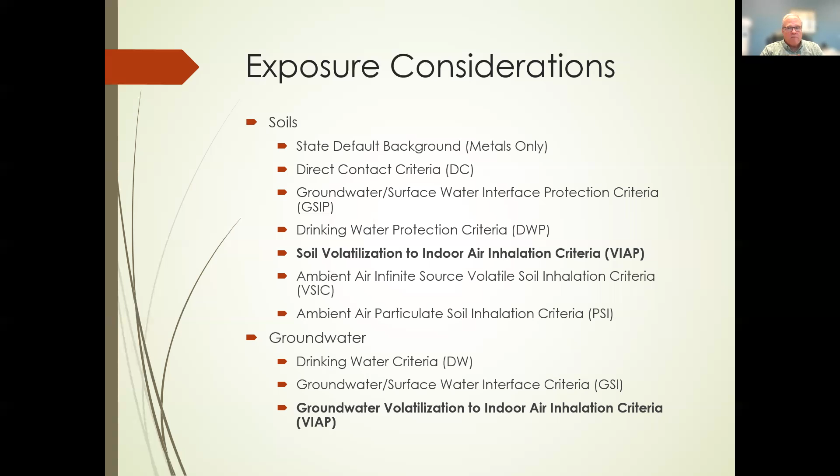Depending on which of these pathways are applicable to your property, you may have different obligations and different procedures. The two I'm going to be talking about shortly are in bold: soil volatilization to indoor air inhalation criteria, and groundwater volatilization to indoor air inhalation criteria. These are two exposure considerations which go to the concept of vapor intrusion, a concept we're going to be talking about, and where most of the change in how you comply with environmental and due care requirements has been occurring.

So let's talk about the basic approach. This is the basic buyer's approach for environmental due diligence. We call it the environmental due diligence process. You'll notice some things are in bold — those are particularly important. Some things have stars — those are the basic liability protection documents from Michigan, there are three of them. Some things are in gray — those don't always occur, sometimes they occur but not always. And then there's a whole bunch of other things in white.

Due diligence is, of course, done to establish liability protection, as I mentioned before, but also the function has to be to identify impediments to development so that you can address them, either by remedy or through some sort of due care obligation.

If your due diligence is not providing sufficient information to understand your obligations on the property, you're not going far enough. This process of obtaining both information and statutory protection has been part of the real estate process since about 1985. When people look at when you should have done due diligence, what was important for due diligence, they generally go back to 1985 and say, if you bought it before '85, you probably didn't have all these procedures. Did it after 1985, you did.

While those fundamental processes remain the same — doing a phase one, doing some sampling, trying to figure out what you have and what you're buying — the fundamental process is the same. They have changed in both how the assessment is done. There's a new standard that just came out in '21, for example, that we'll talk about shortly, and in what you have to do to achieve completion or closure. And all these things now affect real estate timing, the approval process, the construction sequencing, and the cost of doing this.

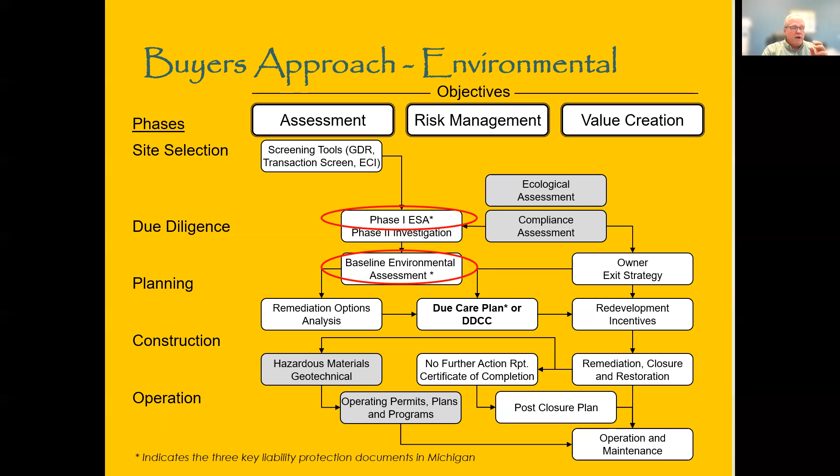In all cases, a phase one needs to be done. I would strongly recommend that any purchase other than a single family owner-occupied residential does a phase one. It's cheap insurance, it gives you some background, it's a good screening tool. The BEA we talked about — those are on facilities only, and only in the state of Michigan. And then we just talked about the due care plan.

Let's look at the different types of properties. For greenfields, which is not really the subject of this presentation, it's much simpler. You do a phase one, there's probably some ecological assessment — wetlands, threatened and endangered species, habitat, something like that. A lot of communities have tree ordinances, but the process is fairly straightforward. When the phase one is done and nothing comes up that's of concern, you're done with the process. Those concerns are called recognized environmental conditions in phase one — that's the term of art.

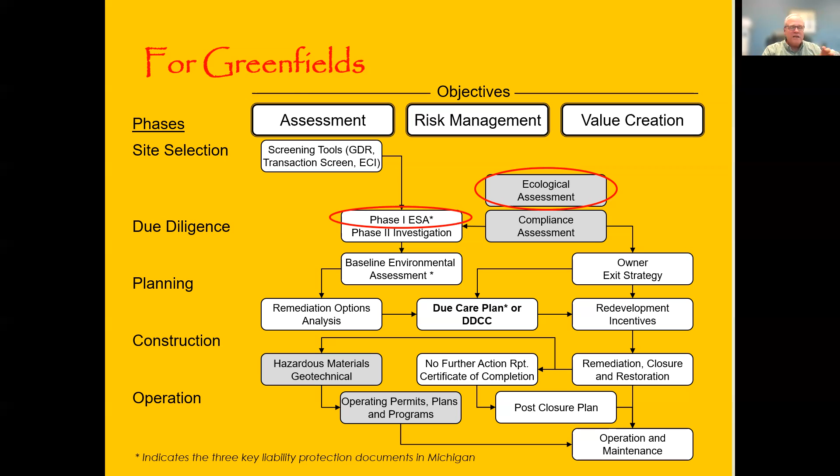On a greenfield site, it usually plays out simply. However, don't assume for a minute that all greenfield sites are simply phase one and done. Use of sites as orchards, underground storage tanks, fueling operations, overuse of pesticides - these things can crop up in a phase one on a greenfield site, but the process generally is much simpler.

In urban properties, it begins to get a little bit more complicated. There's a higher probability that the property is going to be impacted from historic use, and therefore a facility as we've defined it, and additional steps are probably required. The extent of these steps will depend on the chemicals identified, the pathways that are exceeded - we talked a little bit about pathways - and most importantly, the intended future use.

I'm guessing that for most repurposing of commercial, it's going to be repurposed to residential, and that is the most sensitive intended future use. So consequently, there's a lot more documents. There may be a remediation options analysis. You may have to look at hazardous materials in a building or geotechnical issues for a new building because of fill material. You may have some remediation, closure, and restoration, or you may be putting in some kind of remedy that requires operation and maintenance. So it just gets a little bit more complicated, especially on urban sites.

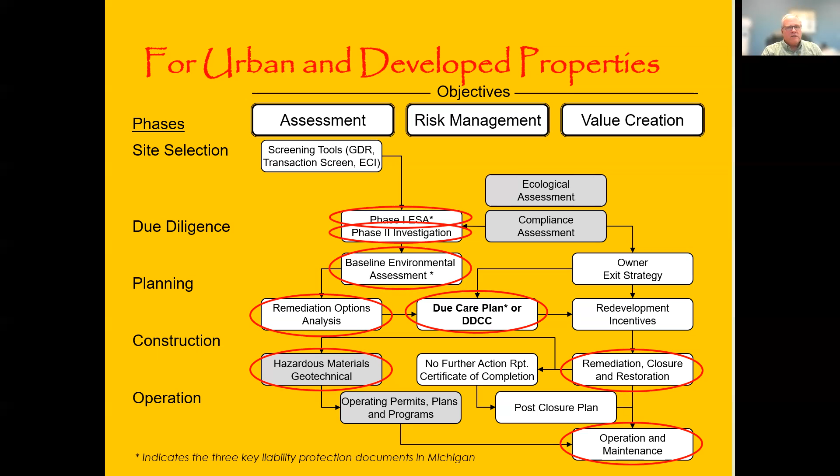Now there's a subcategory of this for acquisition of an existing business, typically an industrial business. In this case, there may be additional compliance assessments, additional operating permits, plans, programs, things like that. So it adds another level of complexity to the process.

And then by far the most complicated kind of subcategory is when you have to have agency approval. This is becoming more common, believe it or not, which is part of the challenge now in repurposing commercial properties. In this case, you pretty much hit every box - there's all kinds of things that need to be done. I'm going to show you what ends up in some cases being an infinite loop on these programs. But you need a lot more assessment, a lot more discussion, a lot more proving out what your assumptions are on the property.

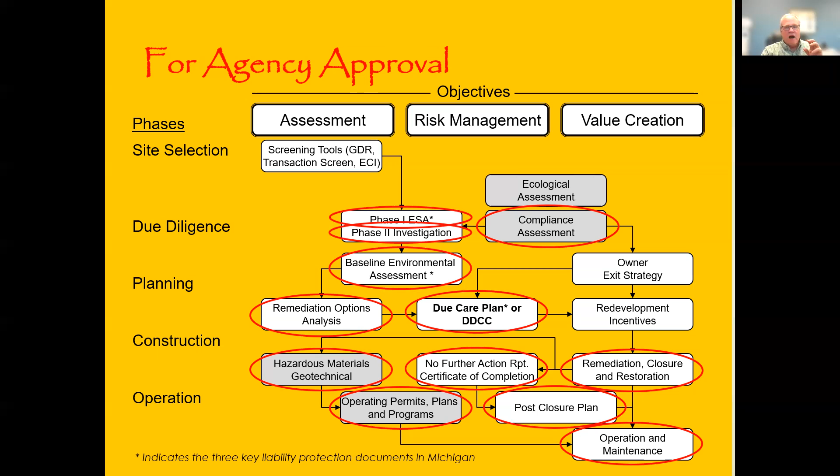Now, there are some other boxes on here that we haven't talked about. There is, for example, screening tools, up there in the upper left-hand corner, which are very useful in identifying big issues on a property, or more likely, they're very useful in identifying and comparing multiple properties. They're quick, they're inexpensive. You can look at 10 or 12 properties and say, well, this one's got a lot of hair on it, I'm not interested in it, so let's winnow it down to a couple and then spend some real money.

But in creating successful real estate deals, there are also some other considerations. On the right-hand side there, we have a couple of them, one of them being negotiating an exit strategy with a reluctant seller. This has come up time and time again, where you have somebody who owns a piece of property and they know that it's contaminated. They don't want to be sucked into a whole bunch of what are called affirmative obligations under the Act, and so they've just held on to it.

They really don't want to do anything with it. Well, there might be an exit strategy. There might be something that protects both the buyer and the seller. There might be something that can be put together to make that seller much more comfortable with the transaction.

And then, of course, underneath that, there's the whole idea of incentives. How do you, in some way, offset these costs? The whole concept originally was leveling the playing field, right? The incentives were provided so that building on an urban site, which has all kinds of additional extraordinary costs, would be the same as or a little bit less expensive than building on a greenfield site. You would level the playing field and more people would build on urban sites. So these incentives are out there to help do that, to level the playing field, to assist in those costs, and they primarily focus on urban brownfield type sites. So they're very much part of the conversation.

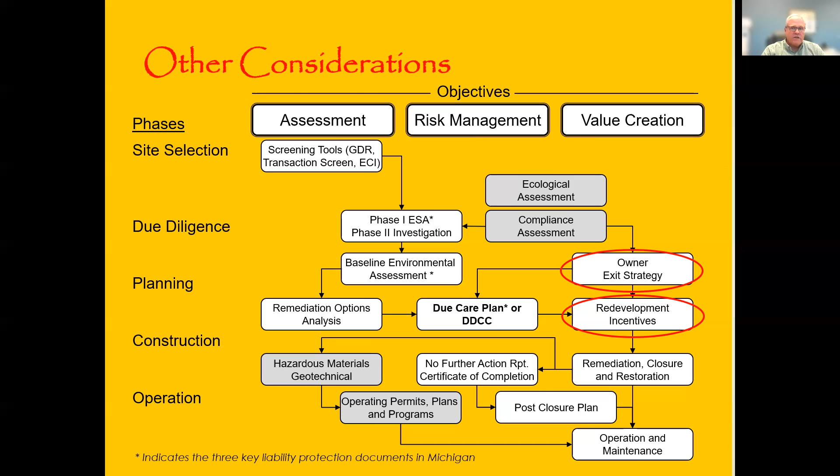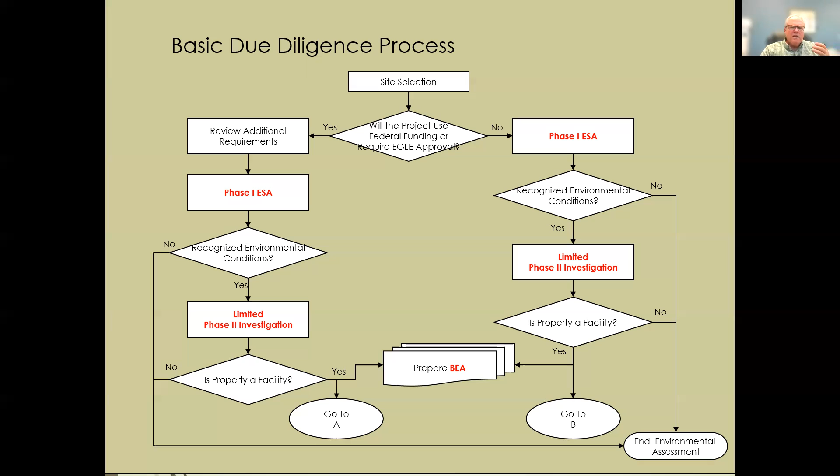And in both cases, you ask the question, is it a facility? If it's a facility, you have to prepare a BEA regardless of which way you go. If it's not a facility, you're out again, and the process ends. But where the real difference happens is when we go to the next slide.

In fact, good science would dictate that regardless of which process you take, you end up putting in a remediation system or a mitigation system that solves the issue. And it should, all things being equal, be the same system regardless of which process you follow.

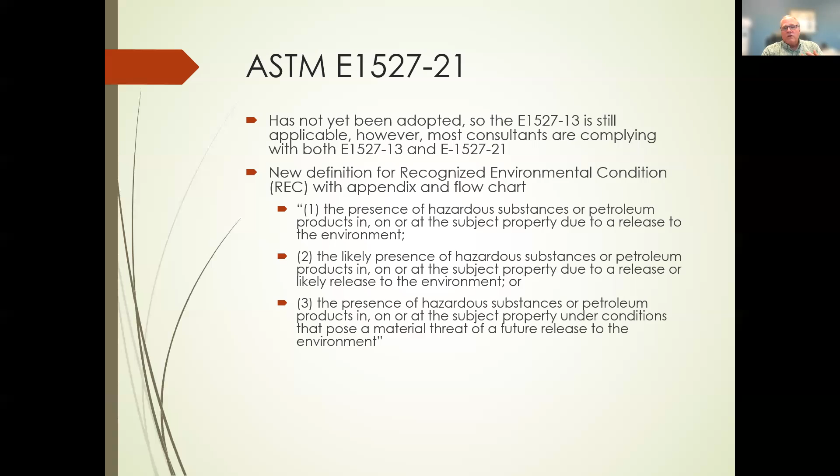This definition and all of the other supporting materials for it, as I said, has already been pretty much in effect for most consultants, and therefore it isn't a big change, but it helps focus and it helps make it more intentional. There's now a requirement to use standard historical sources.

There's been some controversy over using, for example, free historic databases, which don't tend to be nearly as robust as things like the Sanborn maps. And so prior to this particular change, the standard required that you used as many as you could find or as many as you deemed necessary, which could only mean a single source.

Now, you've got to look at these three at least for both the subject property and adjacent property. And more importantly, if you can't review them, you have to say that. In the past, you didn't have to say that.

So again, it's becoming a little bit more intentional and a little bit more robust. It's added a non-scope consideration section.

Now, those of you who are familiar with bank lending requirements know that often in the lender's documents, they'll have additional requirements for phase 1.

Well, we call those non-scope requirements because the bank is requiring them, not the ASTM standard. They've taken a similar idea here and said, look, there's a lot of discussion out there about other things that are going on, especially emerging contaminants of concern. And they're not specifically in the scope of the phase 1, but we really think they should be considered. So these are now called non-scope.

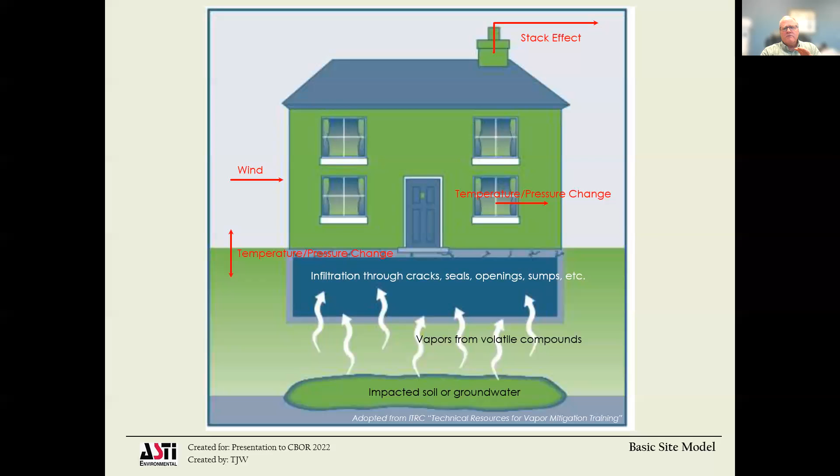So the first challenge is that these regulations and guidance documents are predictive. They don't measure actual harm. Sampling is used to predict concentrations and then to predict risk. And so depending on your model, depending on your site conditions, depending on how good your model is, you can end up with different results.

So what we typically do is we take a soil sample. That's always the first kind of idea on it. We then may take a soil gas sample underneath the slab in the building, and then we predict what's going to be the concentration in the building. Now, I'm being somewhat simplistic in it, right? It's a little bit more complicated than that: nature and extent, determination of physical conditions that may affect volatilization and vapor transport. But in the bottom line, that's what we're going to be doing: sampling the environment, predicting what could be in the building.

And this is difficult because there's also common background sources. I mean, there's benzene, for example, from gasoline, cigarette smoke, scented candles, rugs, paint, glue. There's perchloroethylene from dry cleaners, adhesives, glues. There's trichloroethylene from adhesives, paint removers, spot removers. I mean, the indoor environment is a very complicated environment and has lots of different influences in it.

And whether the chemicals of concern actually impact the building interior is dependent on a number of factors: the concentration, the chemical, the distance to the building, construction, the building maintenance and conditions. And then whether those chemicals of concern are a threat depends on a number of factors: the toxicity of the chemical, the air exchange rate, occupancy durations, and ultimately the actual indoor air concentration of the building at the time.

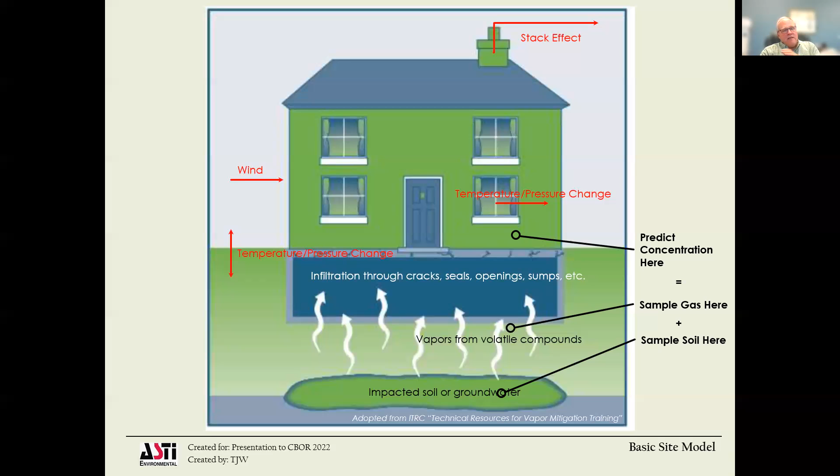These models can get quite complicated. For example, here's just some of the factors and assumptions used in these models: isolation distances, migration rates, fill material versus soil, occupancy duration—all of this is included. The attempt, of course, is to take environmental data and understand its impact on the building.

This model, called the Johnson-Ettinger model, has been modified with policies, procedures, and interpretations by EGLE so that it has layer upon layer upon layer, and may seem overly complicated, maybe not very real world. But the idea is to address what happens between contamination at the bottom there in gray and the building envelope itself.

This involves a series of generic property and building assumptions. Any deviation from these assumptions requires a site-specific determination. Frankly, most of the sites in Michigan require that kind of site-specific determination, because they have fill soils or shallow groundwater or some of the other criteria that don't let you use the generic approach, but require you to do site-specific analysis.

Evolving science keeps changing conceptual site models and data interpretation. For example, now fill material is being evaluated differently than soils. Fill material is in most urban areas. Therefore, you're going to have a conversation about fill material really pretty much anywhere in an urban area.

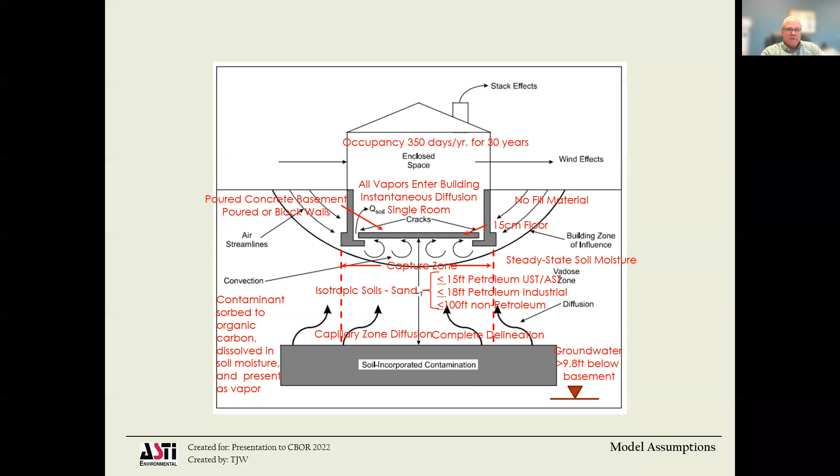The third challenge is that the presumptions in this model are that contamination moves laterally in some predicted pattern. I won't go into too much detail, but the point I want to make is that migration is measured from the edge of the impact, not from the source, which would be A in this picture, not from where the release occurred, which would be B, not from where the release may have just vertically migrated to, which would be C, but what went on in the environment itself, which would be D and E. Then you have to look 100 feet for non-petroleum, 30 feet for petroleum, to determine the impact.

You've got to look at different building types: basement, slab on grade, crawl space, multi-story, elevator shaft. So it does become quite complicated.

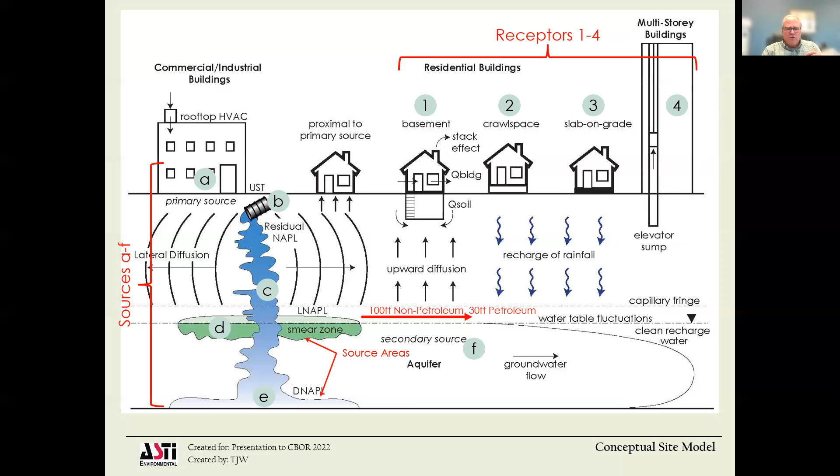Part of the complication then is collecting sufficient data to be able to determine what all these factors are doing, what's going on. The real world implication is that urban properties—for example, this one in Detroit in red—which don't have any specific environmental recs on them, now have adjacent environmental recs.

In this case, there were 3 petroleum uses within 30 feet that, prior to 2013, probably meant the Phase One came out as clean, but now means the Phase One comes out and says, hey, you've got to look at what the impact of these petroleum uses—the adjacent petroleum uses—is.

So the key red flags then become former industrial sites, dry cleaners, gas stations, oil heaters, auto repair shops—all of which have to be looked at not only on the subject property, but in terms of the adjacent property.

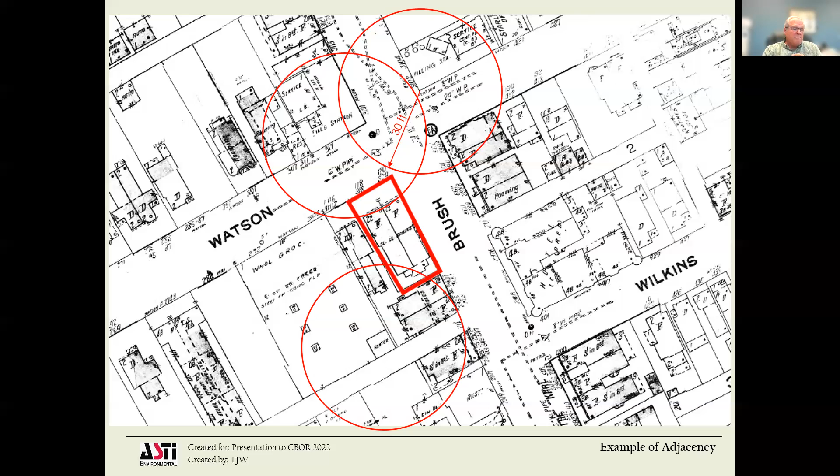The kicker is that once you start sampling, if you find something, you can't what we call 'data out'—which means you can't then do more data and say, well, this data is better than that data. If you detect even a single exceedance, you probably are going to be putting in some kind of mitigation system, because you're going to be assumed to have a vapor intrusion issue.

And then equally important is how the standards are applied. I mentioned mercury before. The volatilization to indoor air standard there, as you can see, is 22. That's lower than our ability to detect it, which is at 50, so it defaults to 50. But it's also lower than the statewide background for mercury in certain soils at 130. And so it sets up this problem where we might find naturally occurring mercury and still have an issue with it.

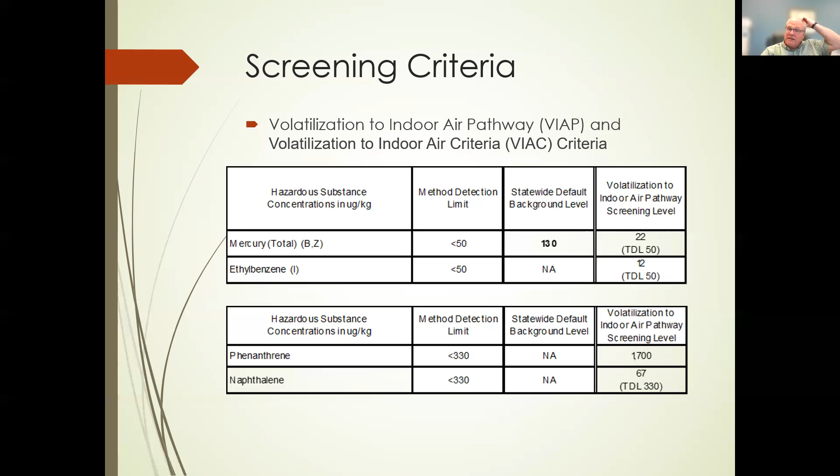Another example of that is urban settings where you have anthropomorphic contributions from just daily activities, such as phenanthrenes and naphthalenes in that bottom table, and the background value exceeds what's acceptable for the criteria—because of nothing having to do with the property, but because it's urban and it's been used. Consequently, as we start collecting samples on properties, we end up with the possibility of finding issues.

And then finally, in terms of all of these kinds of issues for vapor intrusion, there's also some conflict in science and therefore the actual risk. For example, the EGLE recommended media-specific volatilization to indoor air interim action screening level, RIASL—that's a mouthful—for perchloroethylene is 41 micrograms per cubic meter. The OSHA standard for a worker to work 8 hours a day, 40 hours a week, for 20 or 21 years, whatever the active life of the worker is, is 678,000 micrograms per cubic meter.

A study conducted by US EPA in a closet where they had put a man's suit, a woman's skirt, and two blouses came up with actual concentrations of 200 micrograms per cubic meter.

So the science is evolving. What is real risk? What are background contributions? What should somebody be exposed to? There's a camp that says nothing, and there's a camp that says, along the lines of OSHA thinking, there's an acceptable exposure limit. Where is that limit? So the issue here is not just that we have vapor intrusion and vapor mitigation concerns on properties, but that it's evolving science you get involved with, and therefore it's not as easy or straightforward as some of the other issues.

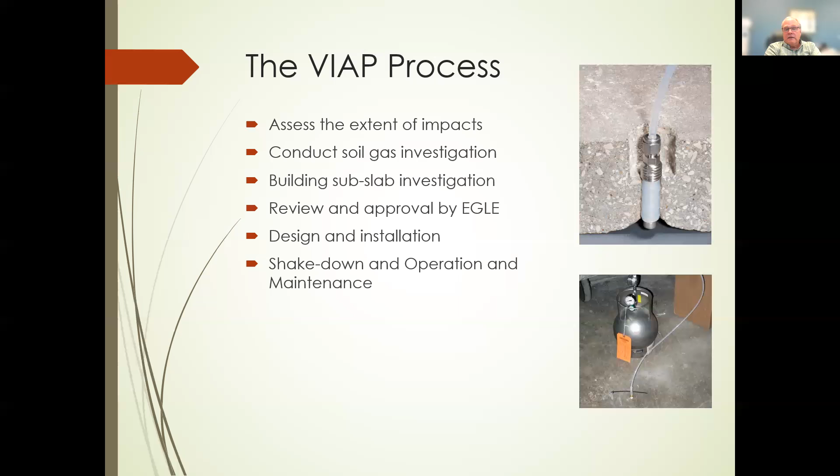What are the solutions? Well, you have to go through the process. The first step is you have to assess the impact of the soil and groundwater contamination. The next step is you have to conduct subslab soil gas sampling, typically below a slab—that's the picture in the upper right-hand corner. Then you have to look at the subslab conditions for design. If you're getting EGLE approval, you have to go through review and approval by EGLE. You then have to design the system, install the system, shake it down, and then operate and maintain it in perpetuity. This is for a potential vapor intrusion issue.

A couple of different solutions: there's vapor barriers, passive soil gas systems, active soil gas systems. And the one that's becoming probably more pervasive, more used, is just soil removal—dig and dump, get it out of there, get the source material out of there. It is expensive, but it removes the need for long-term operation and maintenance.

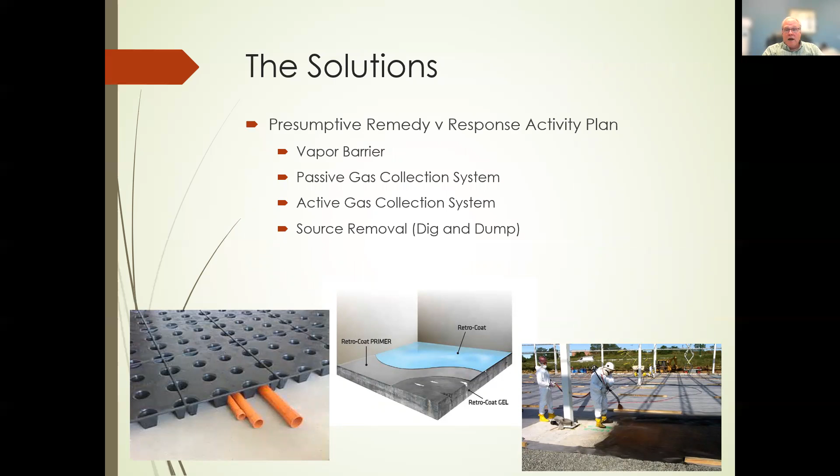So now that we've talked about some of the trends in the environmental side and how they're affecting real estate transactions in general, let's talk specifically about repurposing commercial properties.

Let's start with a couple of assumptions. The first assumption is that you're in a high risk or medium risk category. This doesn't apply to unimpacted sites, which only need a phase one—therefore they're in and out, as I mentioned before.

But it applies to sites that are known to be contaminated, sites suspected of being contaminated, sites that historically have these red flag high risk uses I mentioned, and sites that have fill material—especially if that fill material contains non-soil materials like brick, construction debris, and wood—and anywhere that mercury is detected. Mercury is kind of a special category.

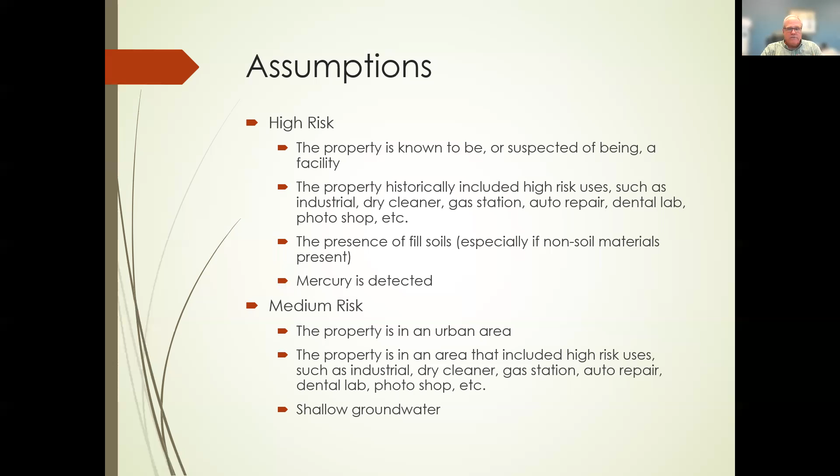A medium risk site is any property in an urban area, any property in an area that included these high risks—doesn't have to be on the subject property—and any place that has shallow groundwater. If your repurposed property sits in one of these two categories, you've got to be ready for a lot more assessment than was done in the past, and probably the installation of some sort of control or mitigation remedy.

Before you repurpose, before you even think about it, you need to consider a couple of things. First, properties that have been previously used, especially in urban areas—and I don't mean just for industrial—will most likely come with historic impacts. Some of those will be area-wide, from deposition from factories, incinerators, or cars idling. There's lots of things that happen in urban areas that created surface contamination on properties. Adjacent uses too—people who in the 1920s and 1930s turned their garages into auto repair shops or gas stations. All kinds of different previous uses can result in historic impacts.

Secondly, impacts can last a very long time. I get many clients who say, well, this hasn't been a gas station since 1920—how can that possibly be an issue? It could be. It depends on the chemical, the concentration, the soil type, and a whole bunch of other factors. Businesses operated very differently prior to the mid-'80s when all these regulations came out, so dumping stuff in the back or creating a pit to filter your greases was all too common. Older sites can still trigger all of these concerns, even if they're very old.

And then finally, the use of adjacent properties up to 100 feet can trigger obligations on your property. So check these things out—if they exist, be ready for a more complicated process than would otherwise be obvious.

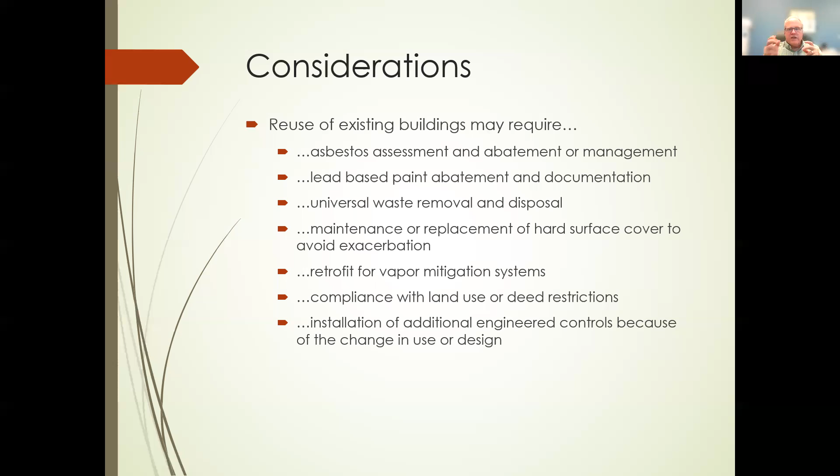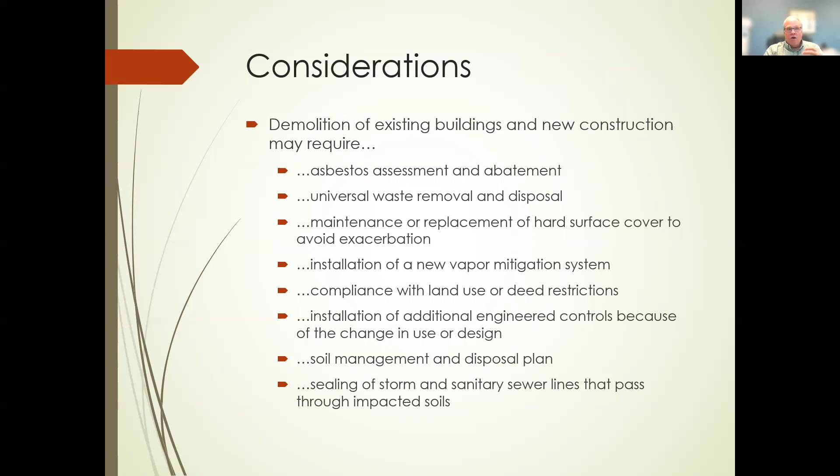Even if you're going to demolish the building, there are additional considerations. Obviously, pre-demolition asbestos assessment and abatement, universal waste removal prior to demolition, again maintenance of hard surface, again maybe a new vapor system, again land use and deed restrictions, again maybe additional engineered controls. But now let's add in, you may need a soil management disposal plan. If the property is a facility, you can't just take the soil off of it. You may need to seal storm and sanitary sewer lines that pass through impacted soils—you can't just lay the lines, because then you have the possibility of contaminated groundwater leaking into those lines.

Most developers fail to take into account these extraordinary costs, so it really needs consideration up front. It can't be something you suddenly discover later on. Now, we've already talked about your capital stack and how it sometimes may suck you into needing additional requirements because you need EGLE approval, but recognize that your capital stack doesn't affect the type or extent of due care requirements that you have.

My conclusion on this is that residential closure is challenging. You have to choose between unrestricted and restricted and all of the implications of that. You may have notification requirements for residents. You certainly have to understand the actual site conditions and address any change in use from non-residential to residential. Urban properties are even more challenging, right? Because you have fill material, there are background impacts. Closure may actually be elusive because of these impacts.

Getting EGLE approval is the most challenging part. Vapor systems may require 1 to 2 years before EGLE approval. So the biggest issue for us is urban residential redevelopment from a previous use that requires EGLE approval. That is a time-consuming and costly process, and be ready to do it. It doesn't mean it isn't worth it, and it doesn't mean you can't accomplish it, but it certainly is a different thought process, time schedule, and cost than looking at just a regular site.

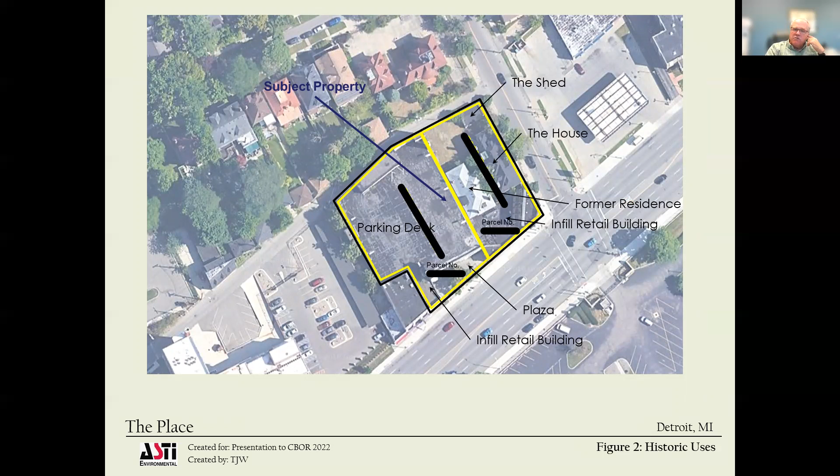Let's quickly, in our last 5 or 10 minutes, take a look at an example project. This is going to be somewhere in Metro Detroit, downtown Detroit, a typical Detroit project, a building that's sat vacant for quite a while. It consists of an old parking deck in the back, some infill retail along the main street, and 2 former residences that have been converted to commercial. So this block, this area, the yellow, which is the project boundaries, is really a commercial development that they want to change into a mixed-use development.

So we'll still maintain some commercial along the main drag in the front, do some residential and commercial along the side street, and rebuild the parking deck. It's a combination of new construction and existing reuse. So it's a real meaty project. It's got all of the components that I've talked about. It's about an $18 million project, and it's going to use multiple sources of funding, including state funding.

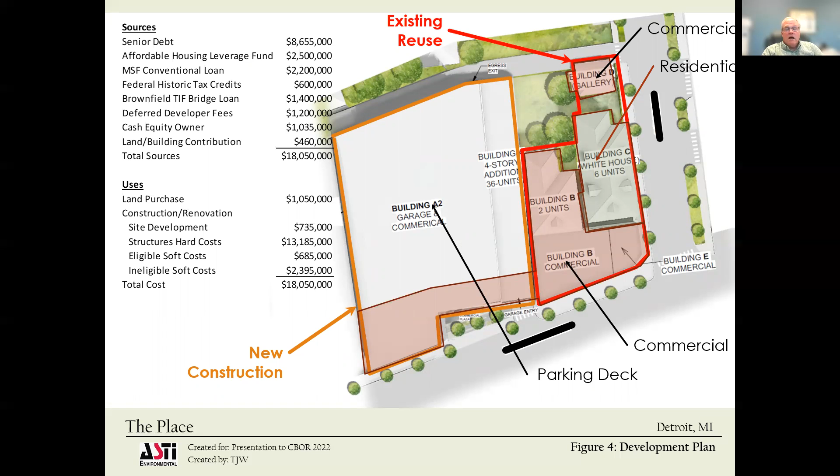And so now we've got EGLE involved because of the state funding issue. It's going to be about 23,000 square feet of residential, 11,000 of commercial, and 67,000 square feet of both parking and event space. When we take everything into account, including all of the incentives, it's got an IRR of about 7.5. That's important because that's a threshold, one of the key threshold criteria for most of these programs.

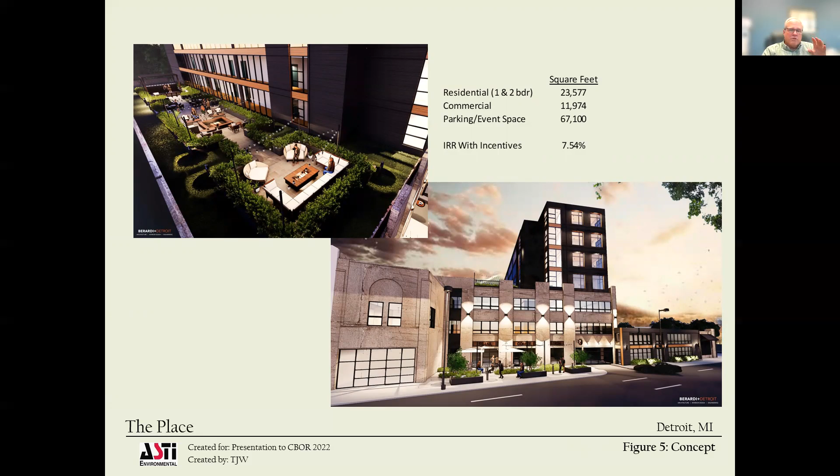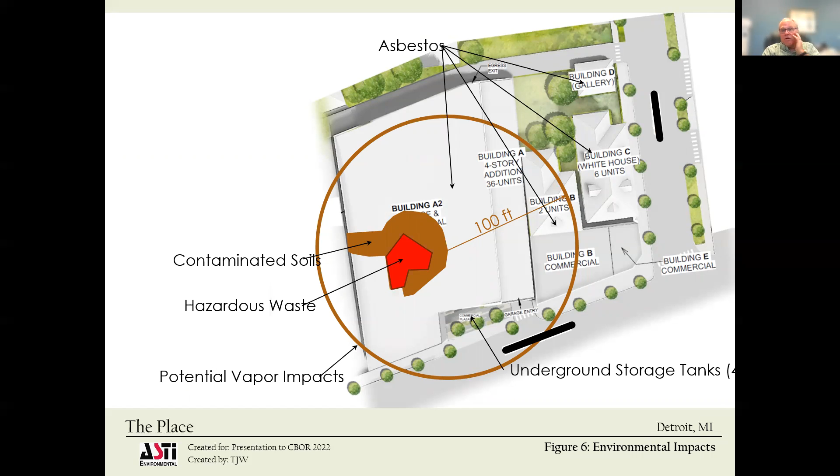Now, the problem is that we've got contamination. All the buildings have asbestos, of course, why not? There's an underground storage tank out front, of course, why not? But we also have contaminated soils in 3 different flavors. We've got contaminated soils that are just contaminated and have stuff in them. We've got soils that exceed the non-residential criteria, and that's that brown area called contaminated soils. And then we have soils that exceed the hazardous waste criteria, so really contaminated soils. We have to look at 100 feet around them because that indicates a potential vapor intrusion issue. So it's got a lot of hair on it.

And these extraordinary costs run about $827,000, with an additional $584,000 for soil remediation in the least contaminated area. That's a pretty substantial ticket, and it indicates that incentives are definitely needed. But the funny thing is that most developers won't even think of those costs when they go into it. It's not part of the pro forma.

I would suggest to you that in any of the high risk or medium sites that I talked about, if you're converting commercial to residential, you need to think about those things right up front. So we've got about 5.8 million here in what are called eligible expenses. You'll notice that some of those costs, like parking deck construction and building demo, are normally conducted on a real estate deal anyway. So those are real incentives, the other ones being extraordinary costs.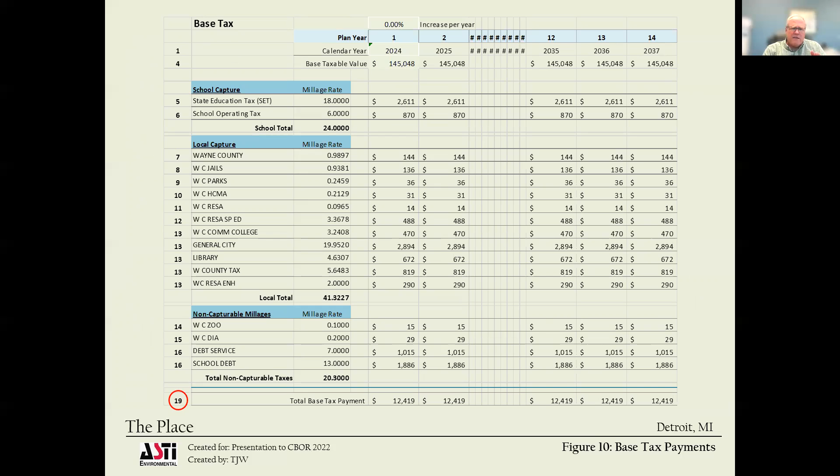The bottom line in all this is that at the end of the day, the project incentives included not only benefits for the developer, 4.6 million in eligible expenses, 833,000 in the tax abatement, 2.8 million for public infrastructure that they're constructing on their property, but also for the local unit of government, the LUG. They get access to the public infrastructure. They get over $1 million in administrative costs. They get over 1.1 million in local revolving fund costs. They also get an increase in local taxes, total tax increase about 2.4 million. And there's something in this for the state, increased taxes and the state revolving fund.

So these are truly public-private partnerships. And the idea is that they benefit by cleaning up a site, by taking a site that was undevelopable and turning it into a project. But this particular project includes all of those issues that we saw in the repurposing of a commercial project.

So in summary, meeting due diligence obligations are certainly the responsibility of every property owner, and preventing adverse impacts to human health is a key component of that responsibility. No question about that. In cases where there's a documented risk, implementing the proper controls or conducting remediation are essential. They're essential for safe use of the property. They're essential under the Act. However, where risks are estimated or assumed or implied or maybe, then implementing those controls can be difficult because the definition of acceptable performance can keep changing based on new data, new research, new approaches.